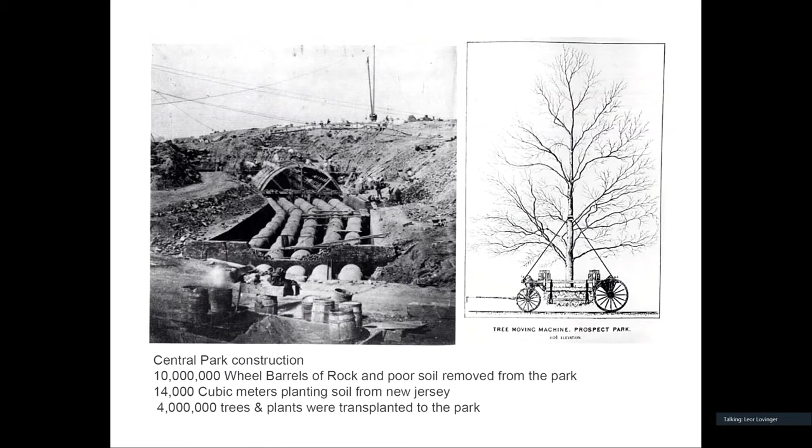There were 10 million barrels of rock and poor soil removed, and 14,000 cubic meters of soil brought from New Jersey, and 4 million trees brought into this park.

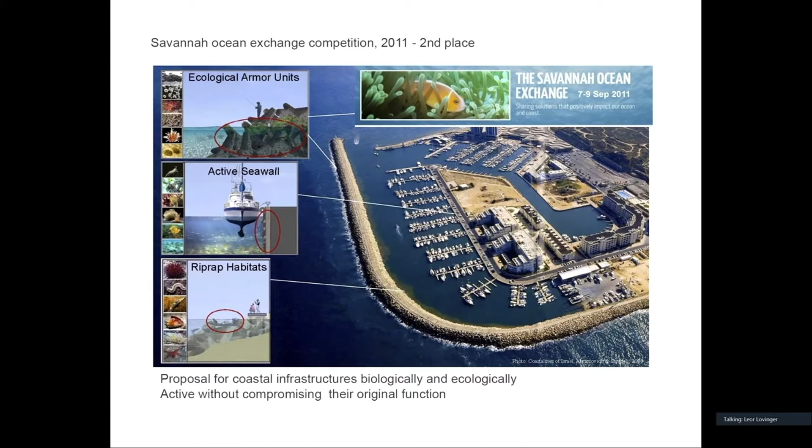They developed matrices of concrete for how basically to recruit biology. Regular Portland concrete, the concrete we normally use, has very high pH levels—it burns everything that lives. So they started developing a concrete matrix that has crushed volcanic rock and organic material inside.

The other factor is surface complexity—where there's more texture, it also recruits more biology. This is all their work, credit to eConcrete. On the lower two slides, you can see their applications in the ocean, and it's been very, very successful.

It's almost like if I were to take the equivalent of a tree, it's as if I would feed a tree each day by pouring a can of Red Bull or some other energy drink into the tree pit. Working with them, I wondered if we could take some of those ideas onshore and develop something for plants on ground, inspired by Burle Marx's concrete vertical gardens.

I had a project on the rooftop, 5th floor of a building in Tel Aviv, and we developed a tile—30 by 30 centimeters—with them, and put it on one of the columns, 90 centimeters wide, 6 meters tall. It was a pilot project.

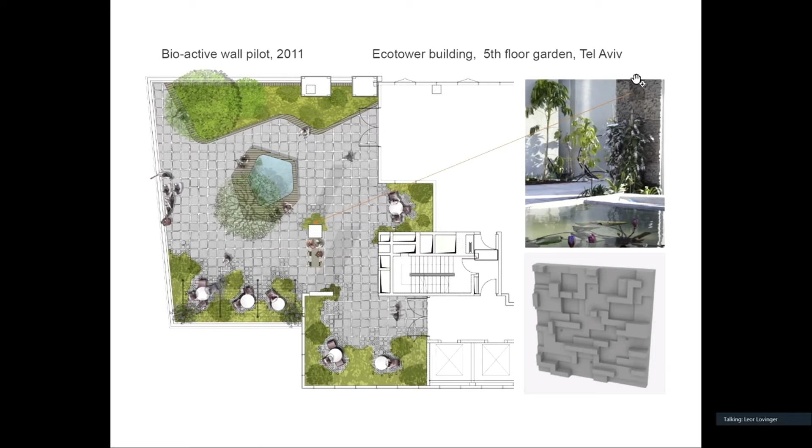The client played ball with us, and this is that roof garden recently photographed, and it has a wall which is very successful. That was the first pilot project.

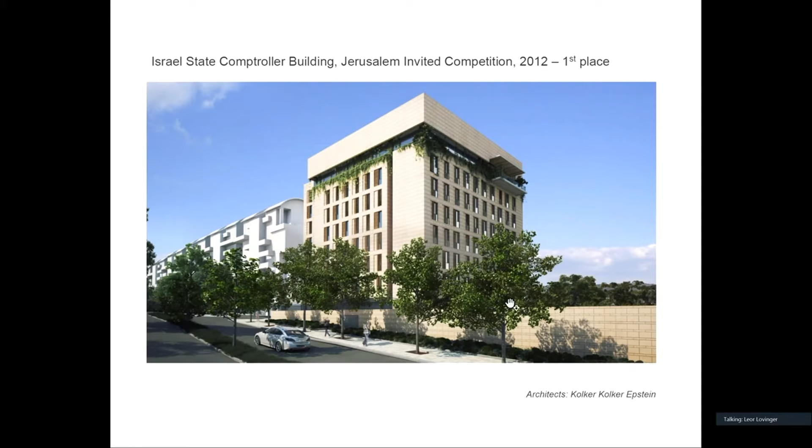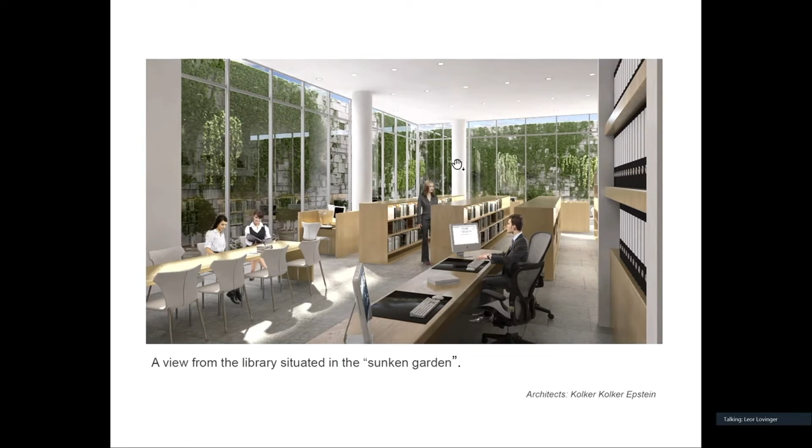Later we competed with a well-known architectural office in Israel for the comptroller building in Jerusalem. We suggested the inner court—it's a very odd building because it's buried in a courtyard that you cannot see here, so we had to develop a very unique concept. Working with the architects, we suggested that the archive, where many people come on a daily basis, would be sitting in a garden, where this type of biological concrete unit would be basically the wallpaper for this garden.

And eventually we also built it—that was the first time we built this material. Working with marine biologists, we kept developing further ideas, for instance, of pockets to plant in.

So here you can see what I was explaining before—there's shops and retail all the way around, an entrance to the courtyard. And the courtyard—I'm going to go one slide back with your permission. This is the southern edge.

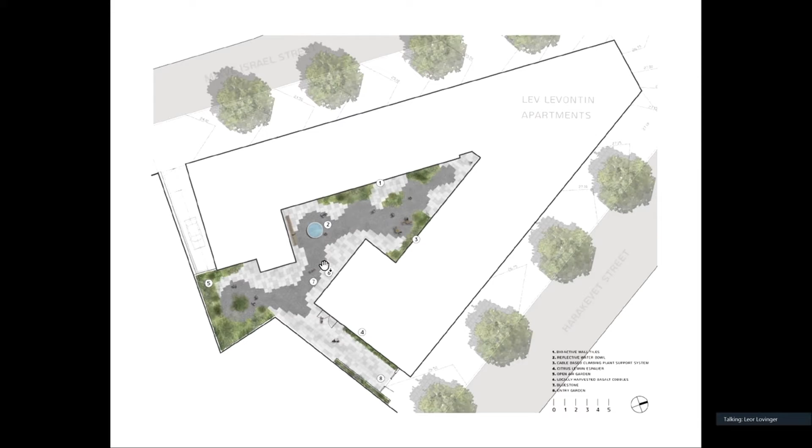When we open it up to the south and we get the sun, the afternoon sun, we basically can work with the Mediterranean palette. We get the sun, we get the plants, and you can see a bit more of that. We're actually working with something someone would identify more as a Mediterranean around Nice, Monte Carlo, less hardcore Mediterranean—it's a bit more lush, and I'll talk about that in a minute.

But the idea of this courtyard is that all along the long wall of it, we put up this wall. What I didn't describe earlier—these 30 by 30 centimeter tiles, if I dip them in a bucket of water and lift them when they stop dripping, they actually hold half a liter of water.

So if I put an irrigation pipe hidden here and turn it on in the morning, it basically drips on the wall, and the wall then becomes a cooling block. In Israel we have a very hot summer, 35 to 40 Celsius almost on a daily basis. So the idea is that, on one hand, there's the beauty that we try to achieve, and on the other, there's the biology of it.

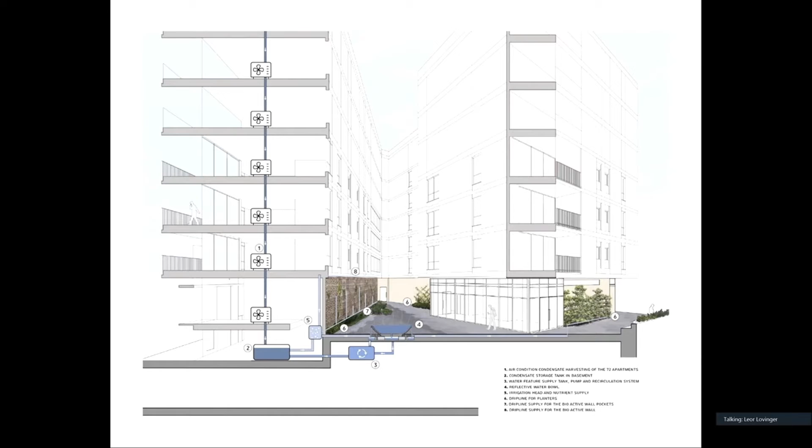One of the things we worked on with the architect and the client: all the apartments have the same air conditioning unit, all placed in the same place, and all the water is collected and reused for the gardening and for the water element that we have in the court.

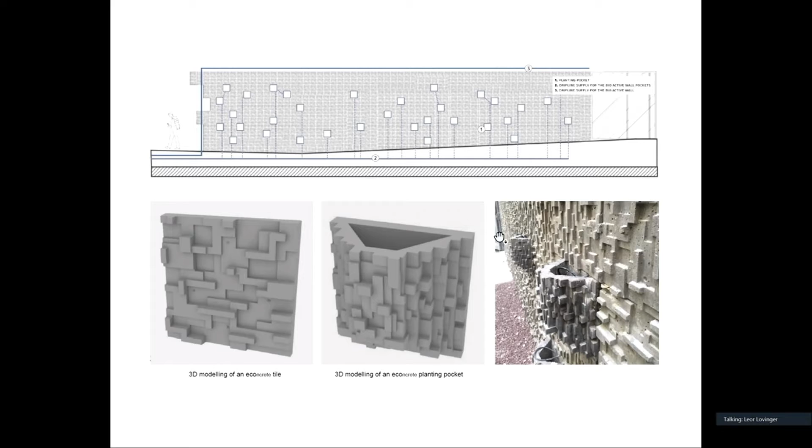These are the tiles I was telling you guys about, and this is the drip line that's at the top of the wall. These are the pockets that we developed and that are embedded in this wall. This is another view of that.

But what I wanted to really show is that it recruits a lot of biology. There's a lot of mosses and lichens and vegetation that grow on these walls because of the organic and patented concrete matrix.

One of the things about the marine biologists—they also conducted research here in the court. We put up monitoring of temperature on the wall, in the court, and outside the court, on the street. Apparently this wall brings a different climate into the court—the delta on a daily basis could go anywhere between 3 to 13 degrees Celsius. That means this courtyard could be cooler, almost 13 Celsius less, than what's happening on the street.

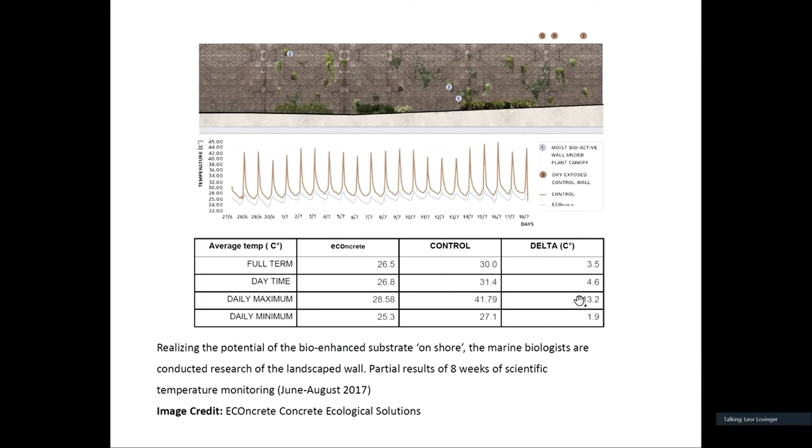We've also been doing research on plants to see what type of plants would work in this court, conducting different types of studies to test them.

And it's been a breakthrough. The court has been appreciated both in terms of climate and in terms of ecology. In one of the recent visits, a couple of years back, we had a group from Milan, and we found this bird—we call it the tor. It's a bird that's disappearing from our cities because it doesn't have any habitat. It was a small circle that we closed by seeing this bird nesting in one of our pockets.

And the project received awards. It's been presented in Paris and in New York at the Design Festival. The material itself is now the same material they're using in New York to build resiliency into coastal areas—it's the same material.

The next project I wanted to talk about is a public building that we've done in Jerusalem, with a very unique roof.

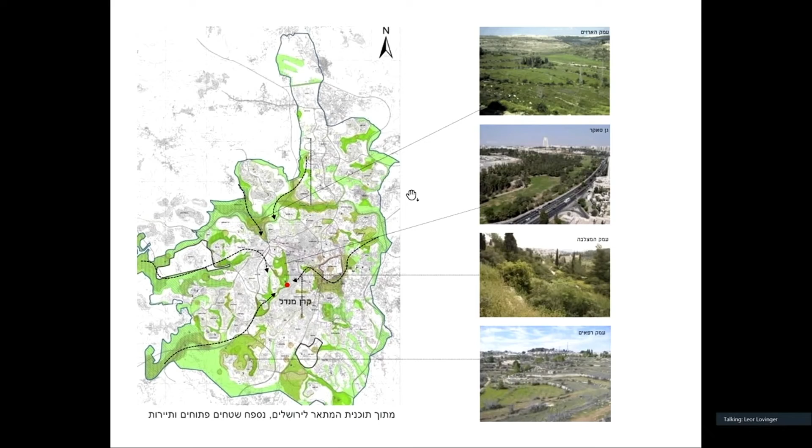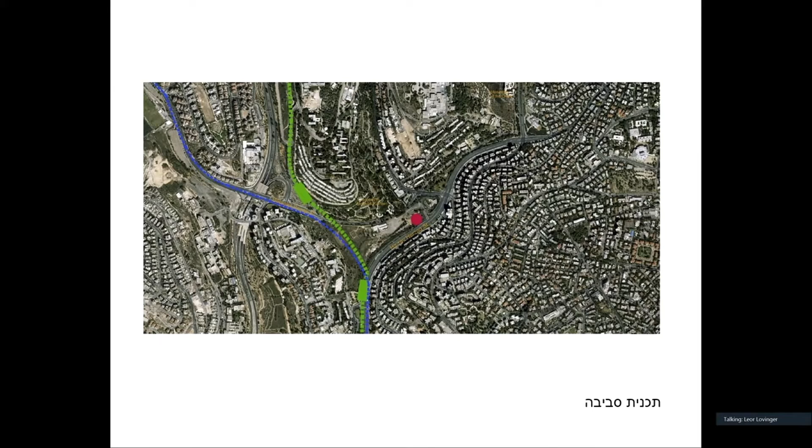This was realized when it was decided to build the Mandel Foundation for Leadership building, located right near the Jerusalem Botanical Gardens. It was positioned in the valley, which, as a decision, was a very controversial one—allocating the building in a valley that had been disturbed. One must say it was disturbed.

This is a drawing by the American architect who designed this building, Michael McKinnell, who also did the Boston City Hall. He sadly passed away last year from COVID-19.

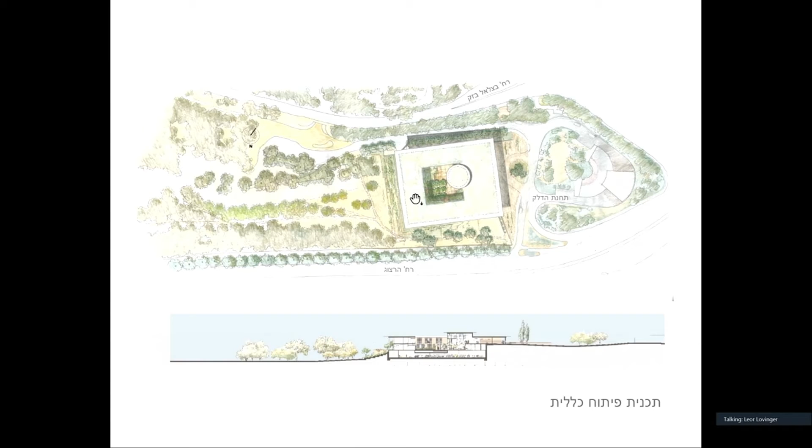The concept for this building was that it sits within a restored valley that flows through, and we were looking at the roof because it's very much visualized and can be seen from all over. One of the concepts we came up with, working with a consultant from the Nature Conservancy, was that we would make a living roof.

Living roofs, or what we call brown roofs, are roofs that you don't irrigate, and the plants on them are local. So what you basically do is peel off soil from a site being restored, or one going into construction—terra rossa, the type of soil—and put it up on the roof.

This is an example in Jerusalem, a bird observatory that has existed for years. You get perennials and all kinds of native plants throughout the year, and it's dry during the season. It creates insulation, which allows for less air conditioning. It has many values in it.

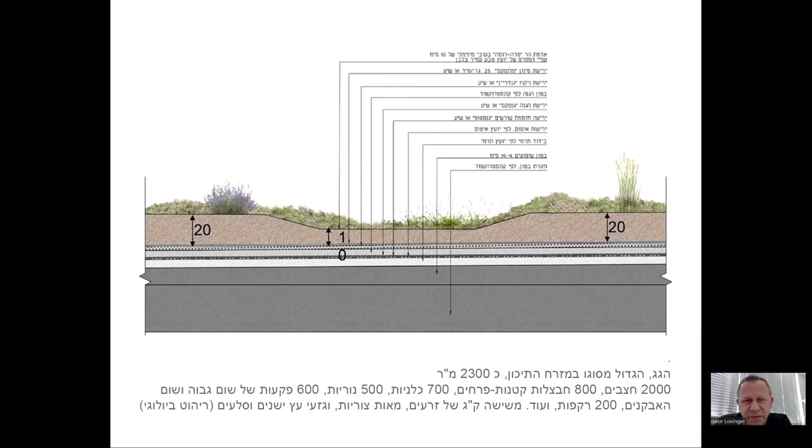But when you look at the roof, it's extensive—between 10 to 20 centimeters only of soil. This one is 2,300 square meters, which makes it the largest, at least in the close Middle East, and some say in the Mediterranean, but I cannot attest to that.

Working with the ecologists, we used not only local soil but also brought in biological furniture—pruned branches, rocks, and hollow decaying tree trunks. We worked with geophytes, all local, basically using lists of local plants, guided by ecologists and also bird specialists.

So, seeds and annuals—this is the planting plan, which looks a lot like a Jackson Pollock painting. From my experience working on green roofs over the years, especially at the office of Van Valkenburgh in New York, I learned that on roofs, because of exposure to south, north, and wind conditions, even a 20 centimeter wall can create a very different condition along its edge.

So we usually take a very Darwinistic approach on roofs like this. In other words, we spread the plants equally—the ones suited to the depth of soil and type of exposure—and let nature do its thing, so that over time, plants that do well in one area can succeed, and others in different areas. So this was the plan.

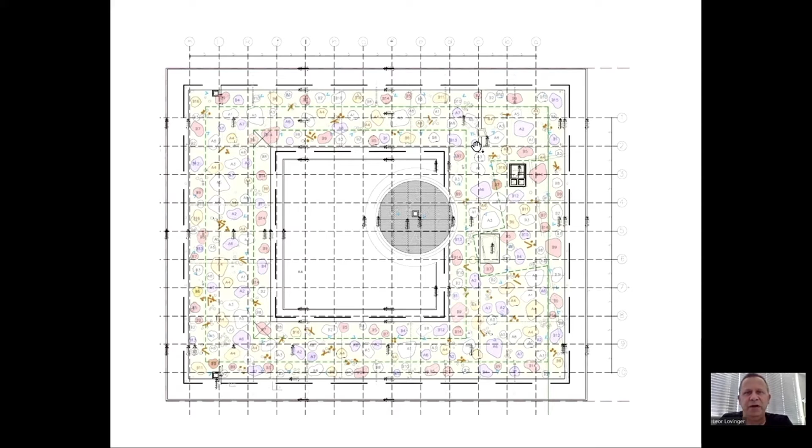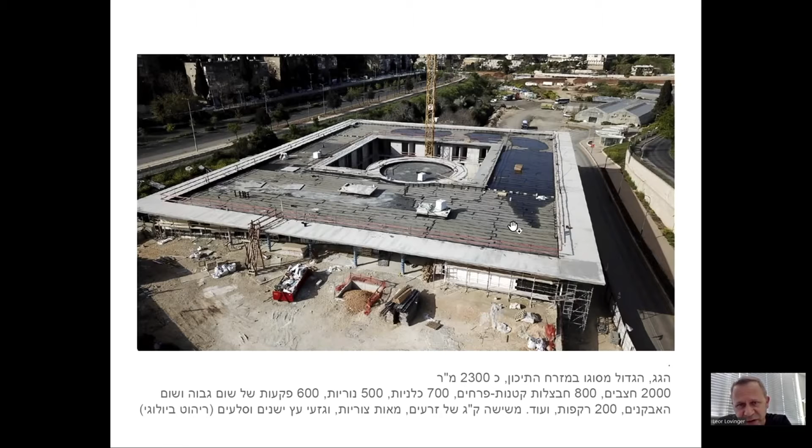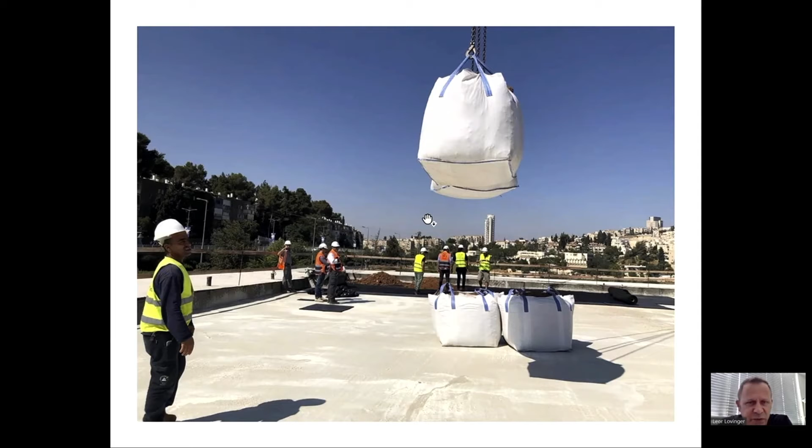To apply such a complex plan, we set up a grid. After doing all the insulation and testing of water on the roof, we bring in the layers—the sections are very simple. Anybody who's done a green roof knows the drainage mats and different layers are very simple; it's low tech in what it does. This is the soil we're bringing from the mountains of Jerusalem, spreading it out on the roof.

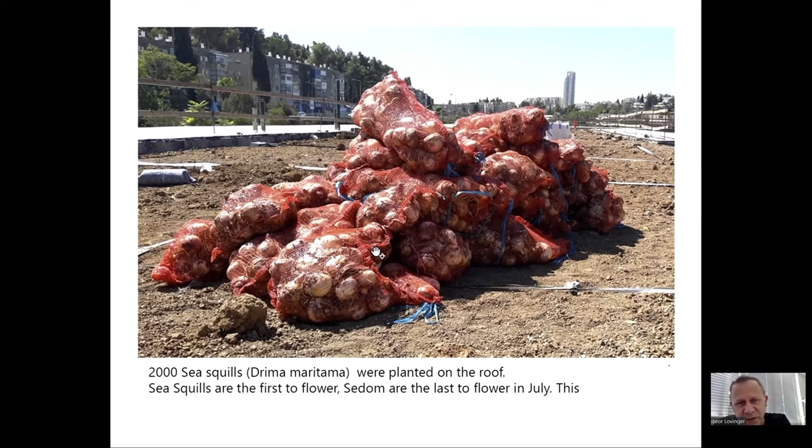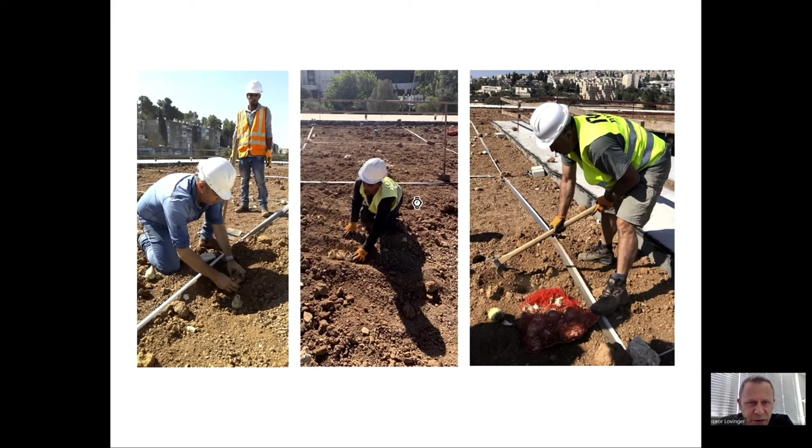And then sea squills, Drima maritima, we had 2,000 of those planted on the roofs. It's a dramatic plant, we'll see in a minute. One thing to say about these projects is that the gardeners who do this work for the city hall do municipal and private gardens. They're used to regular gardening and have very little familiarity with these types of bulbs and seeds. So we've been there almost every day showing them how to plant bulbs, since you can easily plant them the wrong way around if you're not familiar.

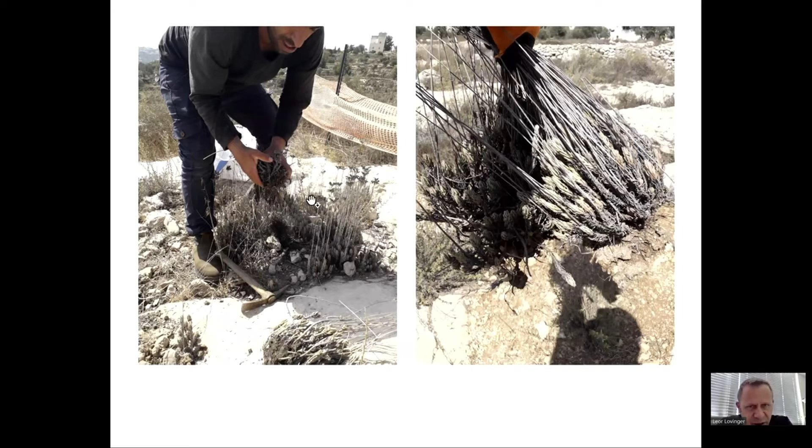These are sedums, natural sedums from sites that are going into construction in Jerusalem. So we collected sedums and transplanted them to the roof. These are the first images after the first rain. October 2019 is when we completed construction, just before the first rains. We can see here after one of the major rains, the roof can hold almost 500 cubic meters of water. So it's also very substantial in terms of water retention and water management.

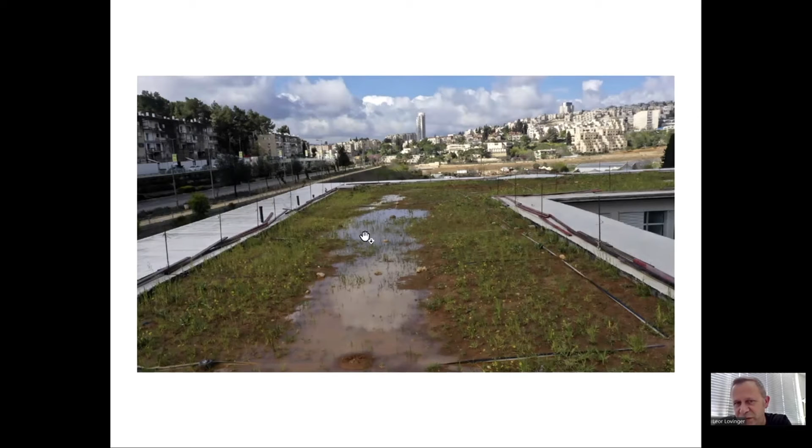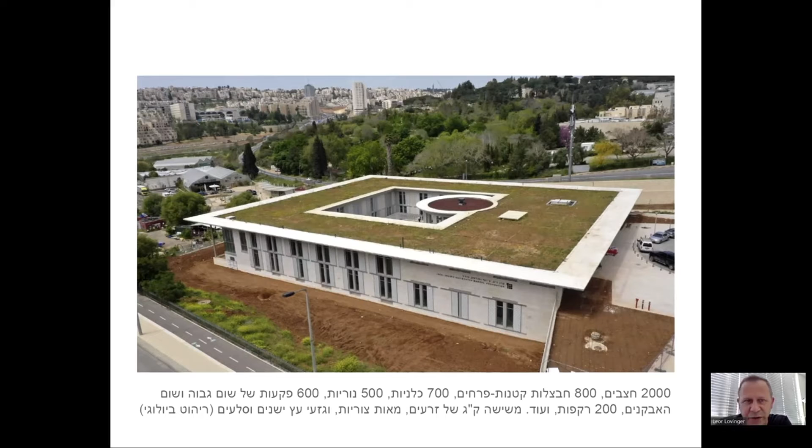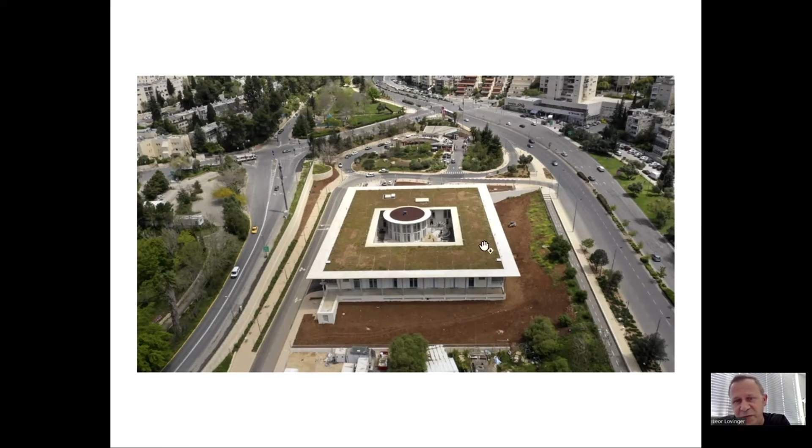It makes it a very natural system. When nature allows the rain, then we see what happens in the spring, and this is all natural. There was no intervention after the planting—no irrigation, no maintenance. These are views in the early spring. The schedule for the roof was planned to work with the weather, so we would be there for the first rains, and the rest of the project was completed later on. These are the first images of spring flowering on the roof.

There's much evidence of birds on the roof, not only the crow you can see here. On YouTube there are several videos that the bird specialist posted, showing a lot of activity on the roof. And the sea squills, you can see them, they just came out this past July, and you can tell some of them get up to almost 2 meters high. This is the bird specialist and director from the Nature Conservancy, who's a major partner in the project.

The last project before I finish is a bit out of the city, but I thought that in the context of these projects it was good to show a small urban scale, a medium level scale, and then talk about another larger scale intervention.

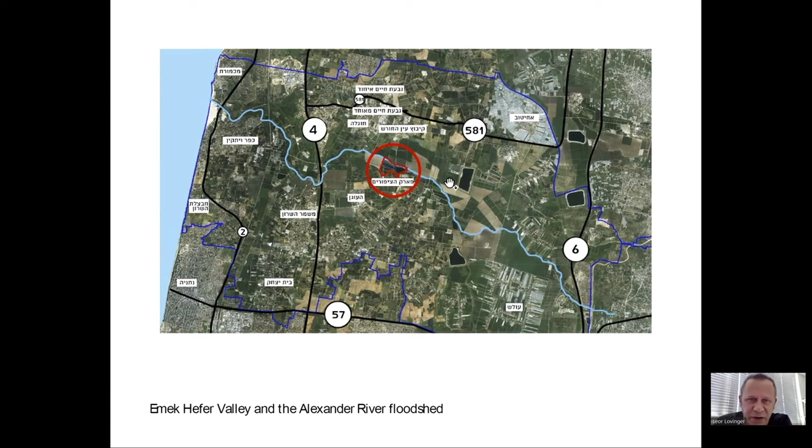So we have some major sites that attract birds. Emek Hefer is an agricultural valley. To orient yourself, for those who know a bit about Israel, Haifa is up here and Tel Aviv is down here. This is the Alexander River. In this valley there are many pools that collect stormwater from the rivers and streams, and they basically feed the agricultural valley. This is our site.

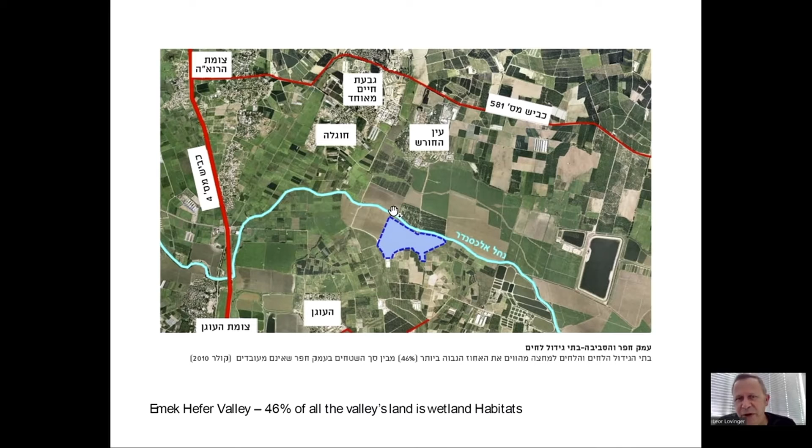46% of all the land use in this area is aquatic and water bodies, which makes it great potential for birds, and we actually have a lot of birds coming through here. Up until recently, because the weather is also so crazy due to climate change, we've had migrating birds in Israel up until two weeks ago.

So this was the plan we suggested. It includes a phase B, which hasn't happened yet. The river goes all the way past the border into the Palestinian areas, which unfortunately don't have enough infrastructure, so a lot of the water coming downhill is polluted. So part of the work involves common efforts between Israel and the Palestinians to address environmental issues and better their lives, hoping there will be much more of that.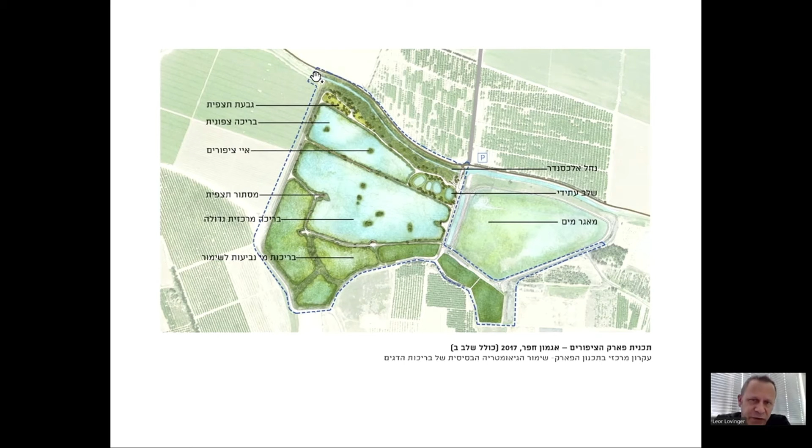What we're trying to do is collect the water, pump it up through a wetland, and bring it back to improve the water quality of the river. We've planned this with a whole team of water specialists, bird specialists, and ecologists.

So we have different situations. We minimized earthworks because there were already ecological values here. We also thought it was good for future generations to know that this area was indeed fishing pools, so we tried to keep some of the site's authenticity. Here you can see the levels of ecological value—the darker the red, the higher the values—and accordingly the level of development intervention.

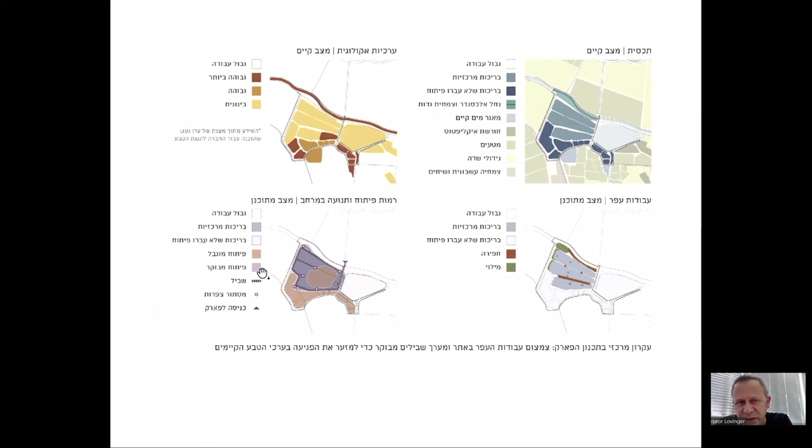One interesting thing that we did with the pools in the dry season is we've done some earthworks on the bottom of these pools. The idea was to create different levels, different depths of water, because each depth of water carries different vegetation and different birds and plants and species. And so that was done throughout the site.

The site was completed 2.5 years ago. We've also designed the buildings, the bird observatories, and the idea here was based on Neufert - a disappearing type of book that maybe the current generation knows less. Neufert is the German standard for building, and it talks about the dimensions of the human body and what we need. We analyzed Neufert and wanted to make sure that if a small kid, or someone disabled in a chair, or a professional birdwatcher comes, they all have their windows and everybody can enjoy.

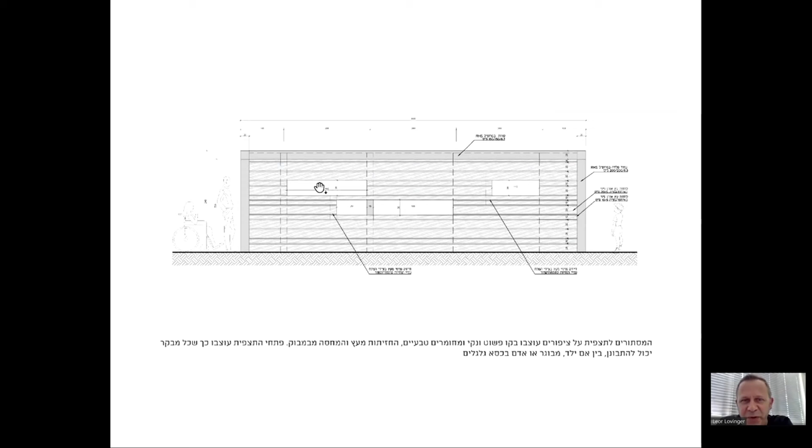So the design that we've seen previously evolved from an idea that talks about the needs of the people visiting, and then how people use it is one of the fascinating things.

I must say it's a great pleasure to see how different people come and interact both with the site and with nature. This, by the way, is 30 minutes drive from Haifa, Tel Aviv, so that means about 2.5 to 3 million people can live 30 minutes from here. So when we talk about making nature accessible to people in the city, it's a small drive out. I know that in Romania there are wonderful places - you can go a 30-minute drive and be out in nature, and all of you know how important that is as a quality of life.

It's also a place where once a year there's an event to take birds that have been either hurt or ill and release them back to nature. There's also monitoring, so we can tell there are birds coming from Hungary and from Russia, and some of them come back almost every year now.